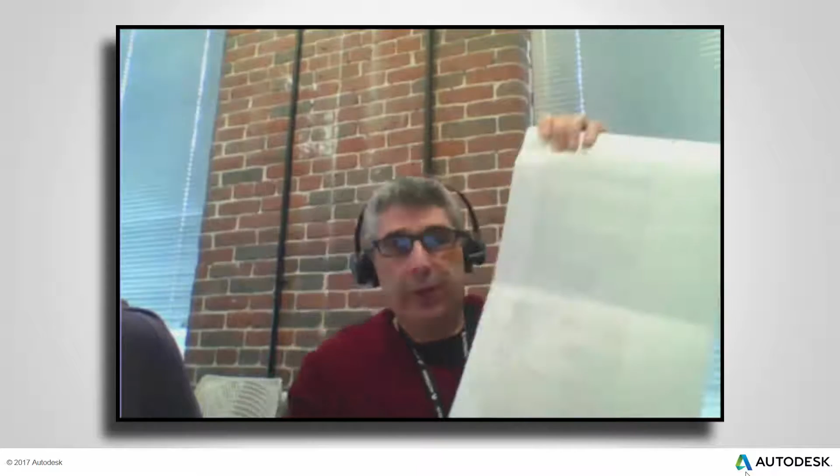To that note, I printed out the list of questions right here, you can kind of see them as I move back out. There's a lot of questions that came in, which is great. There's a ton of information that you're looking for, and obviously we're not going to be able to get through all of this, so we'll do our best. Some of these things we've kind of put into themes and buckets, so we'll do our best to hit upon those along the way.

We've got a couple of folks in the room here who are going to help out. To my right, we've got Peter Funk, product manager for Civil for many, many years, focusing across the board on products, certainly on transportation, but really touching the whole product. One of his focus areas, and one of the things I'm going to have him talk about today, is what we've got going on in our cloud strategy. So Peter's here, he'll be answering some questions. We've got Tim Yaris, Tim leads our product design efforts for Civil 3D.

So anyone who's been involved with any of our validation work, our weekly webcasts, our futures program has likely interacted with Tim. As a Civil 3D user, any features or workflows you're leveraging, Tim's had a significant impact on, for better or worse, Tim? No, for better, all good, yeah.

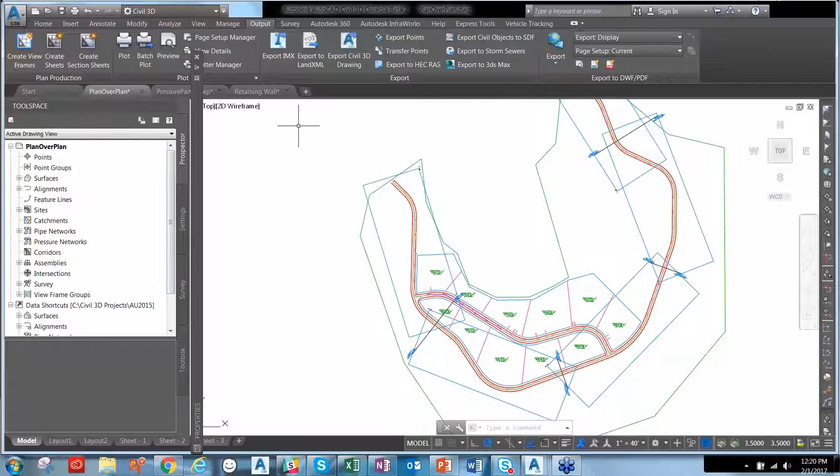The first one that was asked was about the ability to create plan-over-plan sheets versus just plan-over-profile. So if that's something you're able to cover. So long-standing request for plan-over-plan sheets in our plan production tools. This is something that's going to be coming in an upcoming release of Civil 3D. I'll just show you how this is going to work.

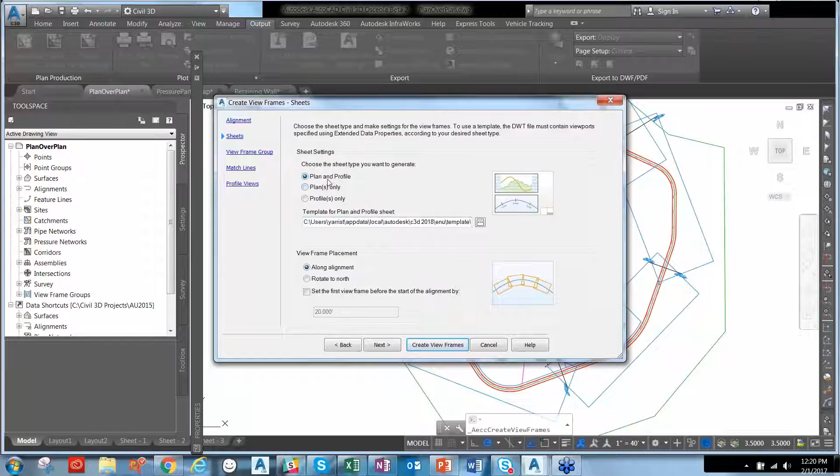So create view frames. We didn't really want to do anything in the way of disrupting the existing workflows that people have in place. So the way that we're going to accomplish this is just the same kind of situation as when you're creating view frames today. When you pick your template, you've always been able to do either plan and profile, or plans only, or profiles. We've now set it up so in your templates you can set up your plan production templates to use multiple plan or multiple profile viewports in there. And I'll show you just how that works.

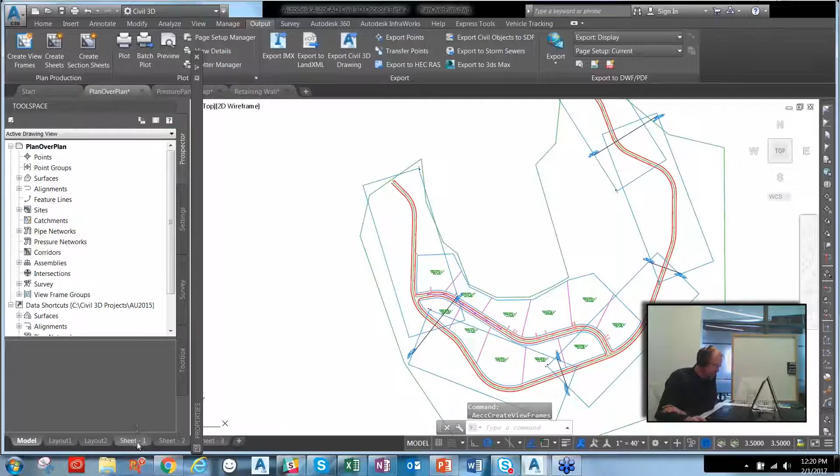But basically, I already set this drawing up so that I already created my plan-over-plan sheets. And so you see here that once you've gone through that process, you just get your plan-over-plan sheets.

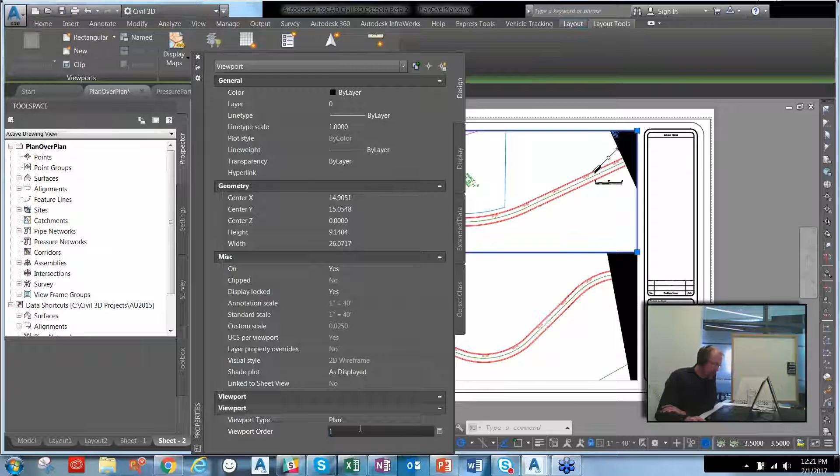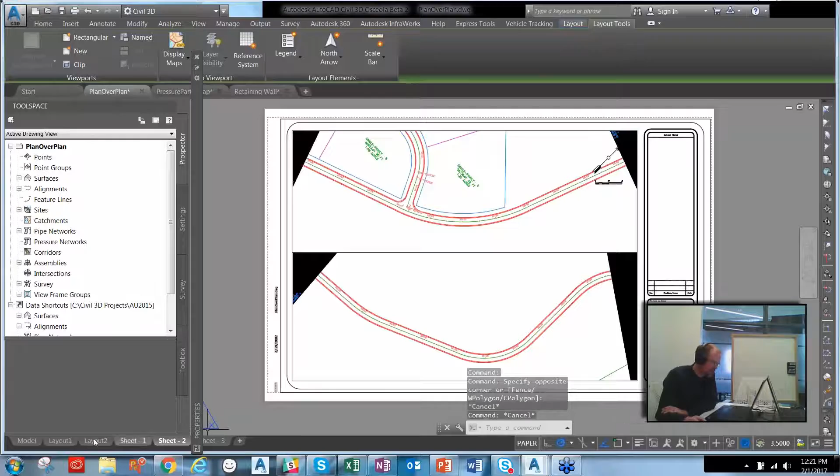And basically the way that works is that for each of the viewports, we added this new viewport order property that basically lets you say which order, as it implies, you want your changes to be represented on your template. So if this is 1, this is 2, it goes from the top down. And we're not limiting you to just two viewports. So as many as you can put into your template, then you can make those sheets using as many templates as you want. Make sense?

One thing I'll say, Tim, and that's good, perfect. One thing Tim said is this is something we're working on in a release. We have no clue when this will ship. So really, this is, theoretically speaking, hypothetically something that we're working on. The point here is, yes, this is something that is certainly in our product roadmap. Some things we can show you a little bit more deeply than others.

So Tim, along a similar vein, there's another request which was related to being able to launch InfraWorks directly from within Civil 3D. Right, so with that, again, this points back to Eric's earlier slide regarding the disclaimer on everything. So let's just say, for example, that we had an Autodesk InfraWorks ribbon tab that we would then kind of go and consolidate all of our existing InfraWorks-related tools. So things such as immediately launching InfraWorks directly from Civil 3D, and then a lot of the other existing tools that we have that are related to InfraWorks. So things such as your exchange settings, that kind of thing, just opening a model directly, and all that kind of thing. So just stuff that you can do in InfraWorks from Civil 3D that might be a bit spread around right now. We're looking into consolidating into a single place to make it easier to use InfraWorks and Civil 3D together.

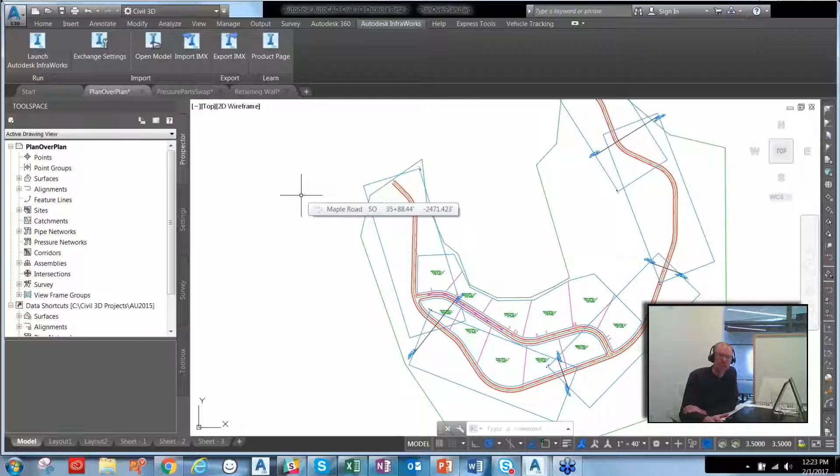Yeah, and along those lines, this is the first step towards trying to provide more interactive dual product workflows. We are very aware that there's a number of additional workflows that we can and should and will target, and they were listed out in a lot of the chat here. I know people are asking about being able to move elements back and forth between the products. We saw it with Bridge. We see it with Corridor. We see it with just general design objects. Point clouds - we'll talk about point clouds in a couple of minutes. So this is a step towards that. First step is to get this kind of tied into the product in a nice, clean way, and then what we envision is this filling out with more purpose-built workflows. So as you think about those workflows, let us know.

Peter will talk a little bit about some different ways that you can contribute ideas or suggestions on the most important workflows to define and help us prioritize those.

So Tim, the last one I wanted you to hit, if you could, related to site. There were a number of questions on the site side, and there's a lot of work we've been doing on refining and tuning Civil 3D. One area we looked at from a site standpoint was further expanding our capabilities with feature lines. We looked at how a lot of people work with feature lines today, using this idea of a reference surface and basically projecting elements up onto that.

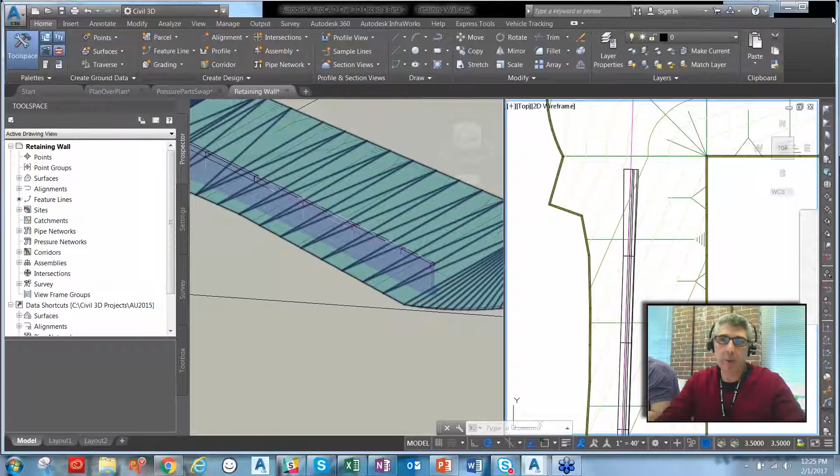Actually, Tim, was I gonna let me... you want to touch that? Yeah, let me touch this real quick, and then maybe we'll come back over to you, Tim, because I want to actually show people that I know how to run the product still.

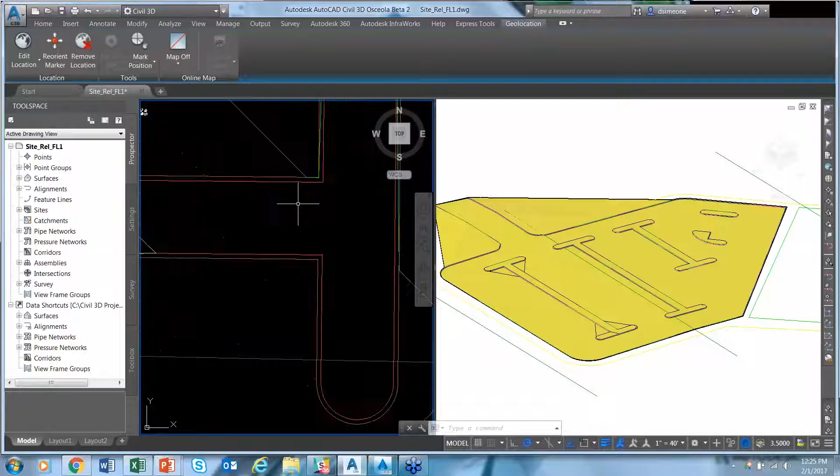Okay, so in this example, I have these 3 feature lines right here. These 3 feature lines are being used to build a reference surface. Basically, what I'm doing is draping these feature lines up onto that reference surface. It's kind of the way we've heard people work and have worked since we introduced feature lines.

What we're looking at is this whole idea of allowing that feature line to remain relative, or basically vertically glued, to that surface. So in this case, my parking island outline remains relative to this surface, named reference, which is basically my flow surface. So now any changes to my flow surface are going to be impacted here.

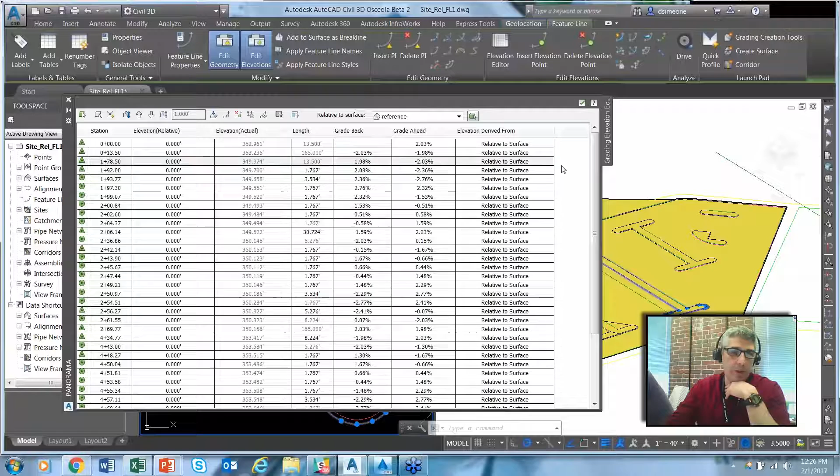The other thing we looked at was, maybe it doesn't drape perfectly on the surface. Maybe throughout the entire feature line, or pieces of it, I want that to be some relative value above or below that. I may also have parts where I actually want it to be at an absolute elevation instead of a relative elevation. So in this case, my top of curb is also relative to my reference surface, but it's half a foot above it.

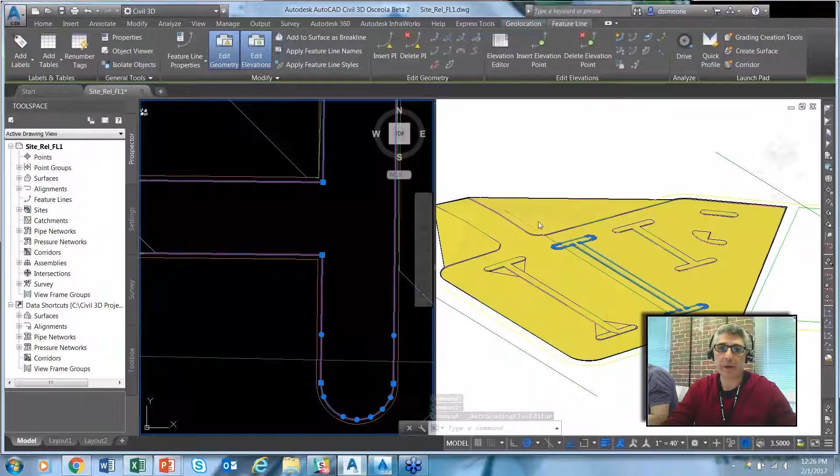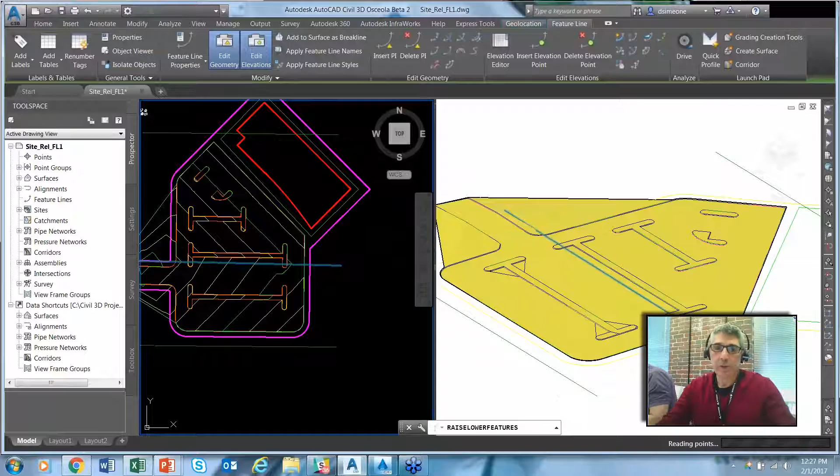And the result, you can see in 3D, I've got my surface created just from those feature lines. This is a very simple case, obviously. But you'll see if I make a change, say to this, let me move this up 10 feet. You'll see that now the whole surface is bent and all those feature lines have moved up, and the surface derived from those feature lines adjusts on the fly.

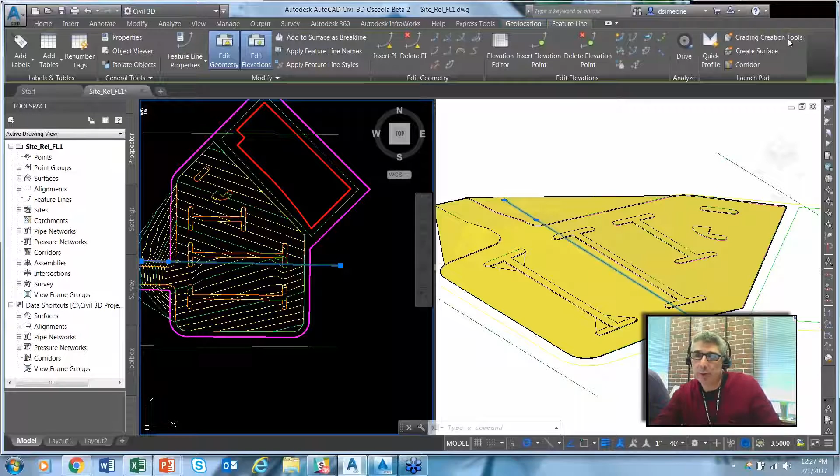So that's this whole idea we're looking at, how do we start to build out some of those ribs that are going to be used in the modeling. Okay, and Tim, now if you could show this in another context, that would be really cool. So I'm going to stop sharing my screen. Sure, I'll make myself presenter.

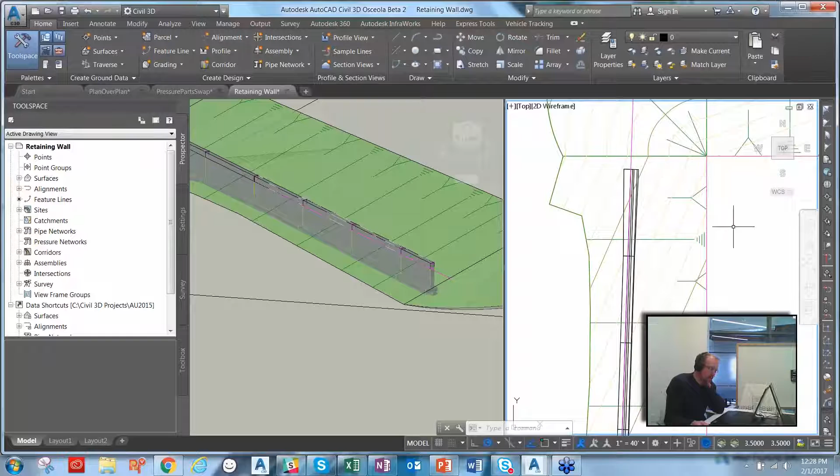Anyway, one of the things we rolled out in 2017 was the ability to use a feature line as a corridor baseline. This builds on what Dave was just showing and also on that feature line as a baseline capability. In this viewport I've got a really simple building pad, and it's graded down into a surface. I've got this retaining wall here that is built along this feature line. The feature line is relative to the surface being created from the grading.

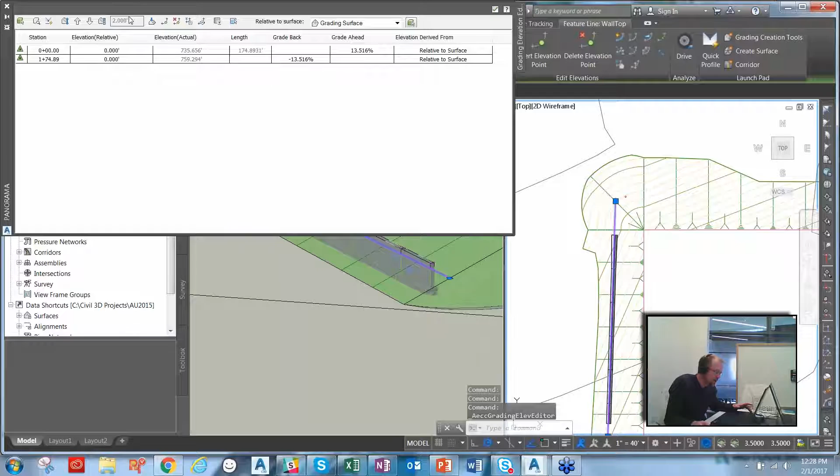So if I were to make a change to the grading, like bumping up the feature line that's driving the grading, you see that other feature line, which is relative to the surface, then moves up. My retaining wall then gets taller because the feature line got higher. My footing on the retaining wall also got larger to accommodate the taller retaining wall and all that kind of stuff.

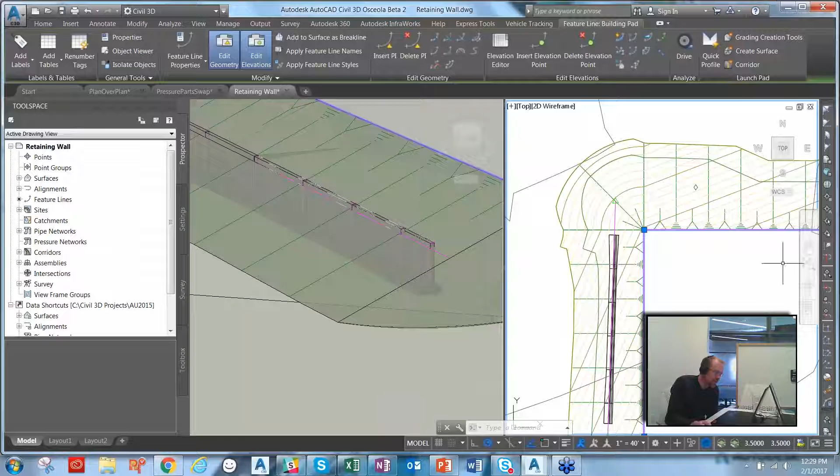So it's just another really interesting way to use some of these tools together, all in one big workflow, and everything kind of stays stuck together. So sound good, Dave?

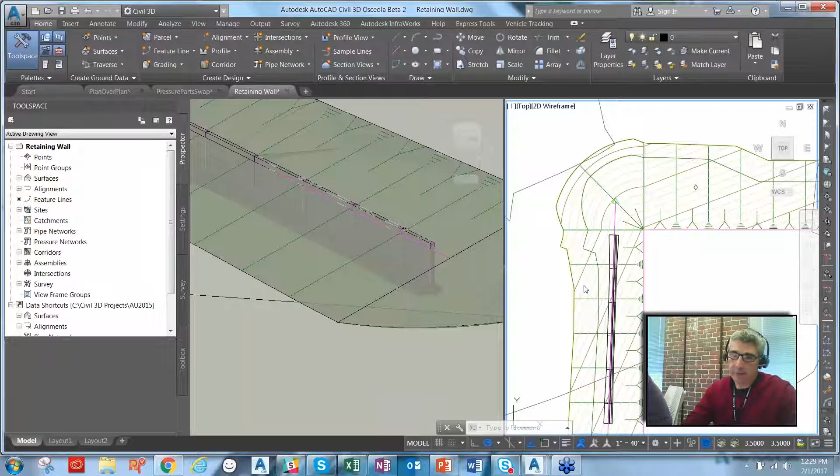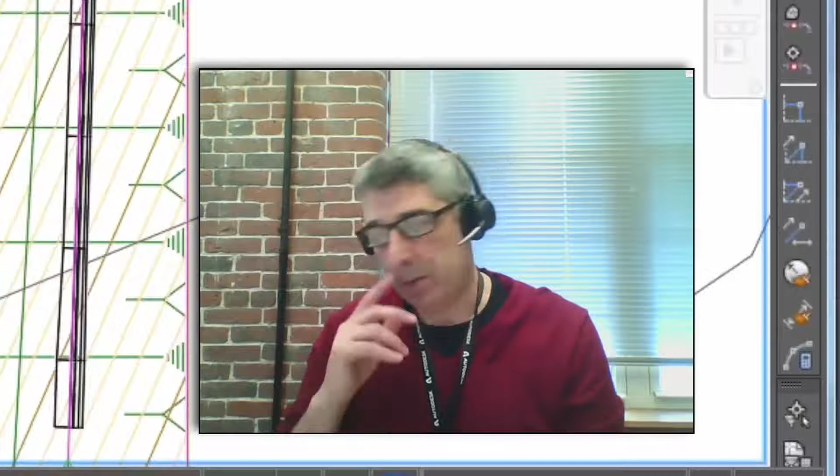One of the things, and there were a number of questions in the list—Peter said there's been a few people posting it—is basically we need more BIM objects for things such as parking, pavement, and so on. Right now a lot of the focus is on those ribs. Think of it like an airplane, where we're building out all those ribs used to control a surface. We're starting to think about how, you know, you don't necessarily build a parking lot or pavement as a surface—those are materials. So we're thinking about how, similar to what we do on the corridor side, we build in some of those approaches for parking.

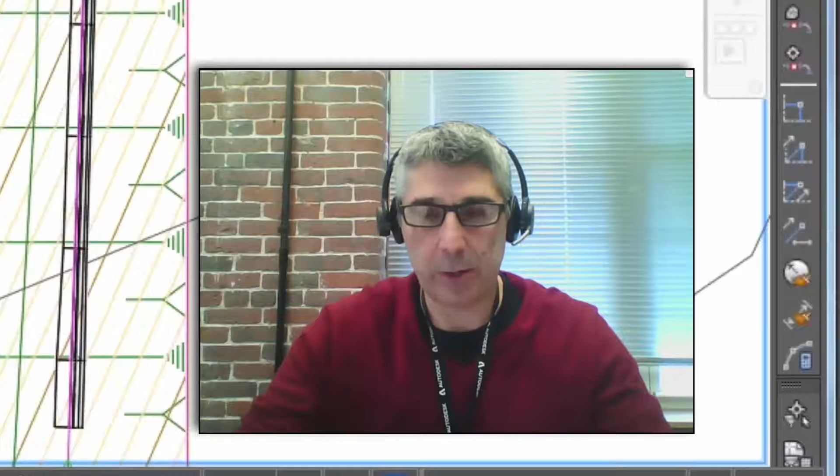All right, Tim, you can stop sharing your screen for one second. Hey, we have a special guest here. You might be on mute—try that. Do I sit next to you, Dave? Come on in.

For those who have not yet met Dan Philbrick, he just happened to be walking by. Dan is the director for the infrastructure team, based here in Manchester, New Hampshire. Dan drives a lot of what we're working on both with Civil 3D and InfraWorks, and other things that pertain to infrastructure.

Since Dan was able to join us for a couple minutes, we thought we'd ask him a couple of questions. Looking at the list, I thought there were two theme areas good for you to talk about, Dan. First, lots of questions on Civil 3D and InfraWorks—what's the strategy between those two? How are we looking at those fitting in the market? Where do you see investment, and near and long term, how do these things really fit together into the world?

All right, thanks Dave, great question. Before we get into that, I don't know if everyone on the call knows we used to do the Dave and Dan show—or was it the Dan and Dave show? Not sure which, but it was the Dave and Dan show. Several years ago, when Civil 3D was a little earlier on, we'd do webcasts weekly or bi-weekly, and one of the fun things was coming up with topics, sometimes pulling content together last minute. So I saw Dave walk by my office today, and I'd seen his face all over social media this week, and thought, wow, what's going on here? He walked by around 11:15 getting his computer ready, and I asked, is it starting now? He said no, it's at noon, I'm just testing the equipment. And I thought, wow, things have really changed with the Dave show. So congratulations, Dave. But anyway, thanks for having me join.

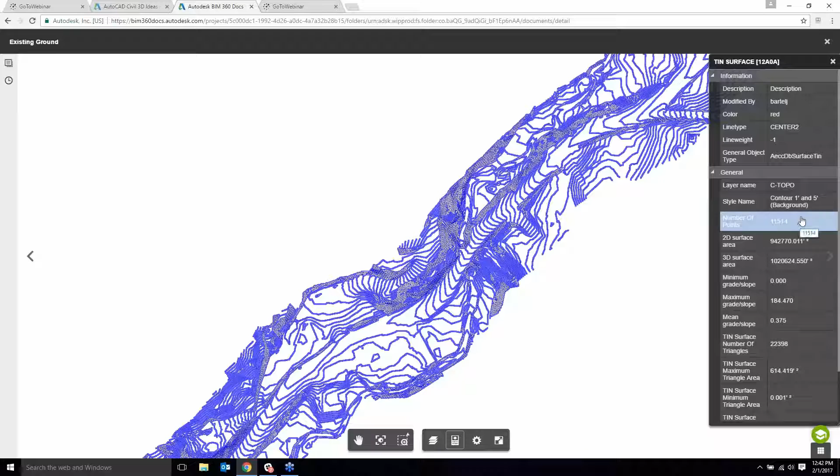Okay, all right, so this is part of it. This is BIM 360 Docs that I have open. And if you're familiar with Autodesk Drive or A360 Drive, you're familiar with the idea of taking files and putting them into a location on your machine that then is mirrored up to the cloud. And what we're looking at doing is extending that so that once the files are up here in the cloud, somebody can go in and without Civil 3D or InfraWorks, they can open up any of the drawings in a viewer. This can be web, it can be mobile. And you can see the surface. And if you pick on the surface, you go into the properties, you can see all the properties of the surface right up in this web interface. And this is a 2D view. We can go to a 3D view. Let's go to this view. So we're seeing a full 3D view of the model in the web viewer.

So this interface lets you share drawings within a team, within a dispersed team. So if you have a team in the East Coast and a team on the West Coast and they're both working on the same project, they're both able to use the same data through the cloud interface. So your drawings would be mirrored to your local machines. You'd be accessing on your local drive mirrored to the cloud. So there's no NAS devices, there's no network devices that you need to replicate, say, a Vault server. It's all done pretty much seamlessly through the BIM 360 Docs interface in the cloud. Okay?

So that looks awesome, Peter. I mean, this is Dan again. So just a couple comments on that. That's looking at some of the capability that's in place now. But as we look a little further ahead, InfraWorks plugging into that environment, one common way of managing your users. So if you're managing a project, whether I'm managing Revit users or Civil 3D users or InfraWorks users, one common way of managing users. All that data shared in the same location under BIM 360, whether it's your Revit information or Civil 3D or InfraWorks, and then of course managing permissions and controls to it, so you have the right access to that right information.

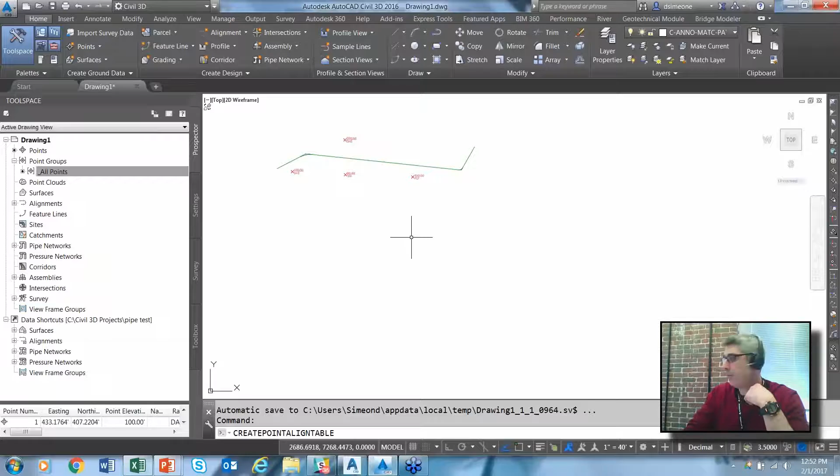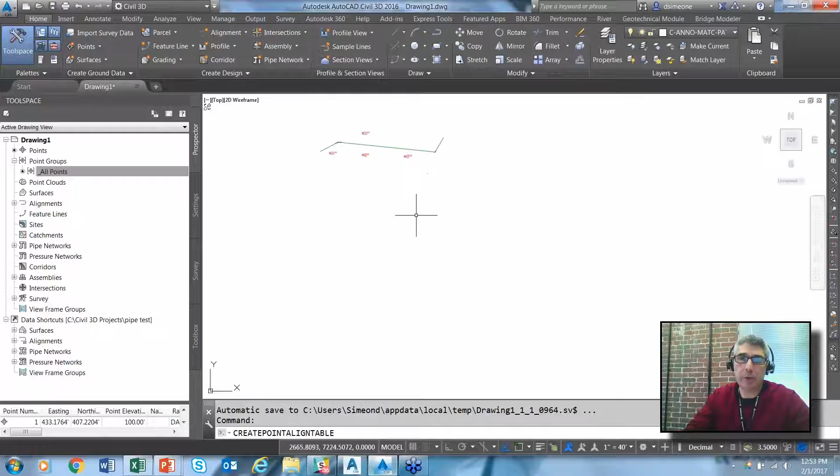So basically a COGO point alignment offset table. This is an example of something we're looking at here, where you're able to specify an alignment, and maybe specify a point group, which is kind of out of here, pick all my points. Right, so here are all of those points and their relative chainage, so station and offset.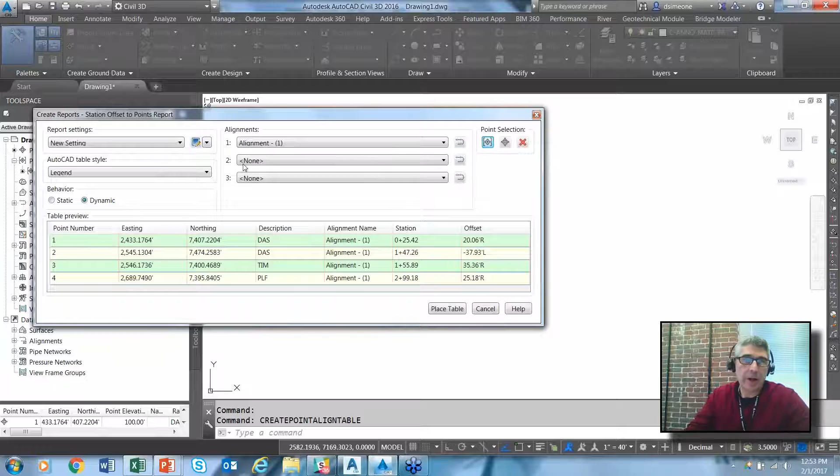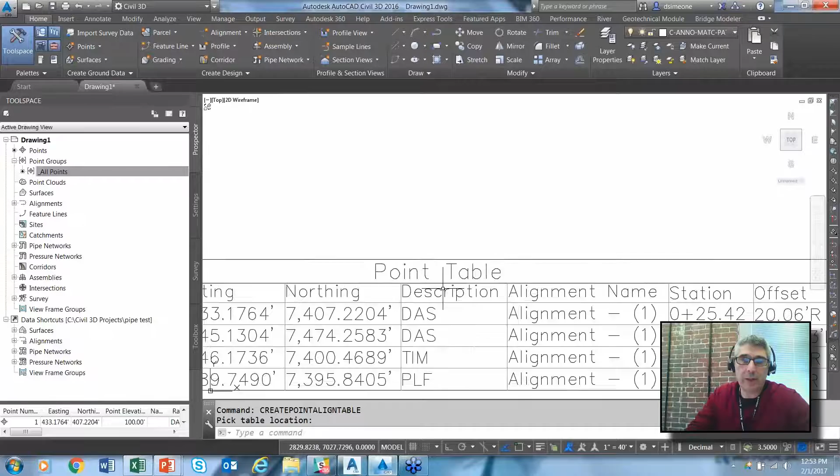If I have multiple alignments in my drawing or in the style for my table, I'd be able to have my multiple alignment, station offset values included here. But in this case, when I place the table, you'll see what you get is an AutoCAD table, right? And this is all, again, dynamic. If I do anything that's going to change, in this case the alignment or move one of the Cogo points, right, you'll see it's going to update.

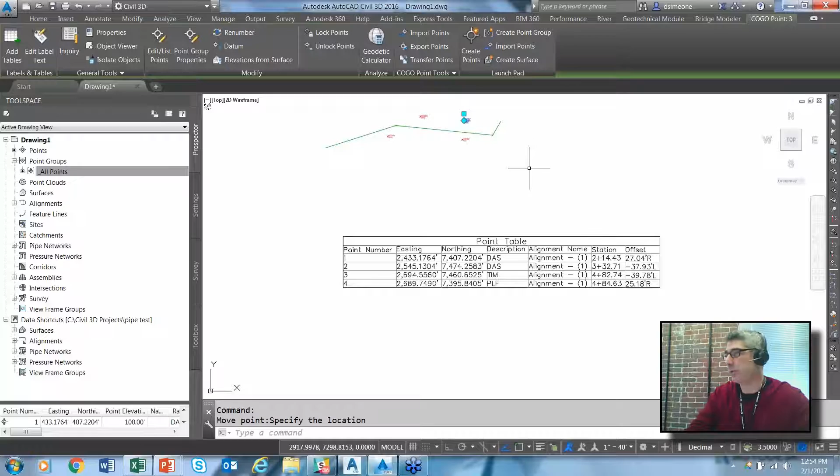In this case, I think we're moving the Tim point, right? So Tim's being moved kind of on and off the alignment, or to the left and right of the alignment. But again, to the point, right, this is something where it made more sense now, rather than using the Civil 3D legacy table object, far more appropriate for us to build this using a straight AutoCAD table.

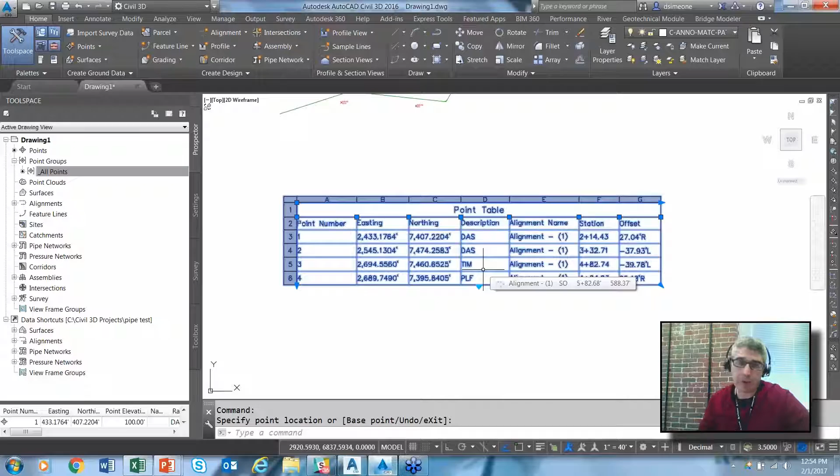We are looking again at purpose-built tools. So in this case, we have a specific requirement, like Peter said. I need to be able to make a table that has my Cogo points that are relative to an alignment. Okay, that's the purpose, that's the specific requirement. And then we're also looking at things such as Idea Station, which says the most important thing is we need to be able to start using and leveraging that AutoCAD table, or the capabilities that are like the AutoCAD table. So this is sort of a combination of both. Can you repeat that, Tim?

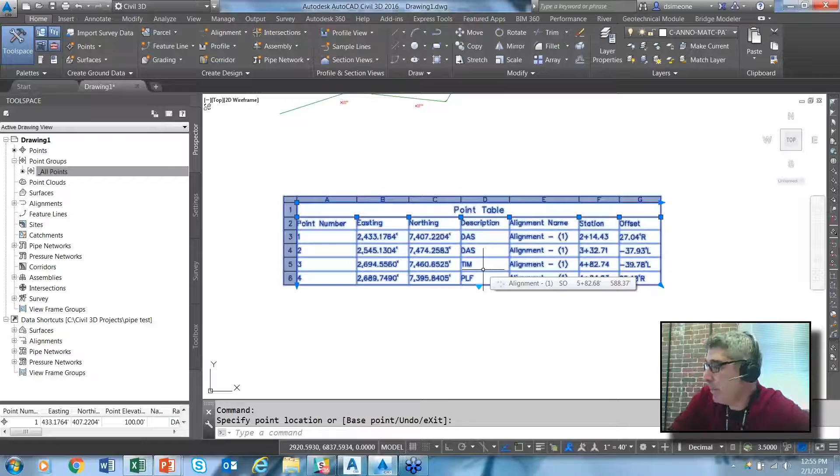Okay, so the next thing is, let's say we have these priorities, we define scope. The next part of it, and I think this will probably be the last area we can focus on, is how do we go about really validating those ideas? How do we go about making sure that what we build is actually what you needed? Remember, when we're dealing with customers from all around the world, what you need in New Hampshire may be very different than what's needed in Germany or Japan or Iowa. There are different requirements based upon industry and geographic region.

So we try to get a broad view of people's requirements as best as possible. So we've got a couple of programs, and Tim is actually going to speak to that right now. Again, our offer to you is that the more people we have involved with these programs, the better feedback we can get, which ultimately ensures we give you a better solution to the problem you've identified. So I'll turn it over to Tim. Great, thanks, Dave.

How's that? Awesome. Okay, great.

So the main method we use as the product team to interact with users and validate what we're researching and working on is this idea called the Civil 3D Futures Portal. Essentially, it gives us an opportunity to talk about things under non-disclosure that we're either actively researching or actually working on getting into code. This gives us a chance to post ideas up here and say, hey, we're thinking about working on this particular tool or workflow. Here's a proposal for it. What do you think? We get your feedback on it before we put it into the product.